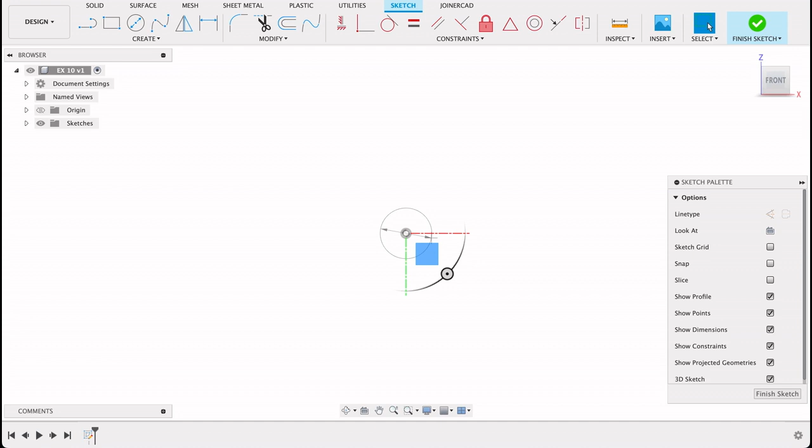I'll go into this one, create a sketch on any plane. C for circle, 24, 40, and now we've got our vertical lines.

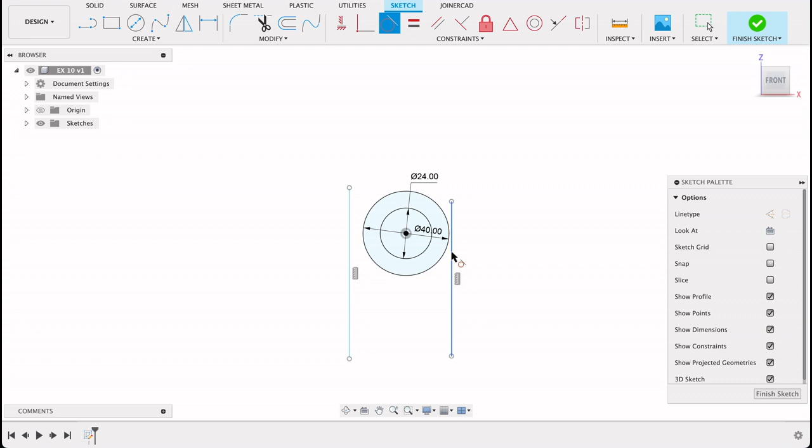L for line tool, and I'll just run them down vertical, not measuring them out yet, just making sure they're at least 30. Then we go tangent, select the line and the circle, and it pops it on there. T for trim, and we can trim this excess.

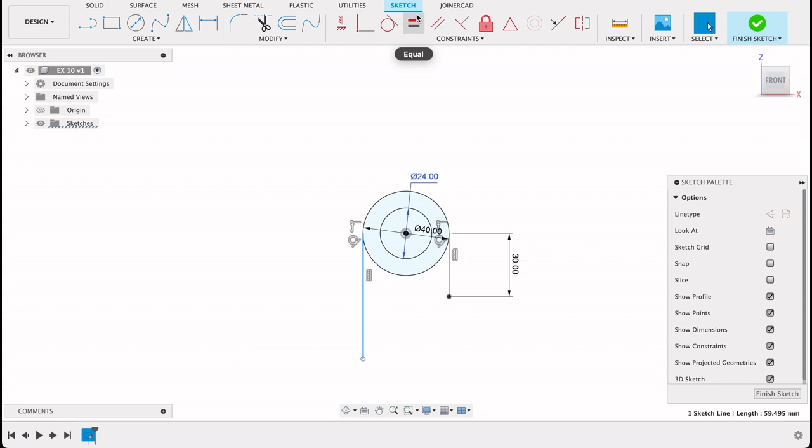Now we can dimension, D for dimension, set them to 30. I could do the same for this one, but instead I'm going to put in a horizontal constraint between this point and this point. Then we can see it's fully constrained.

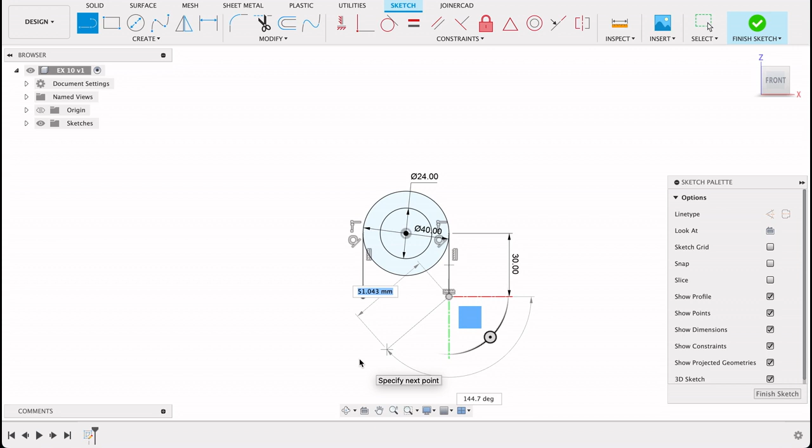Then we've got these diagonal lines running down. They're 50mm long and offset 45 degrees from that vertical. So we'll go line tool from this point, 50. Again, line tool from that point, 50.

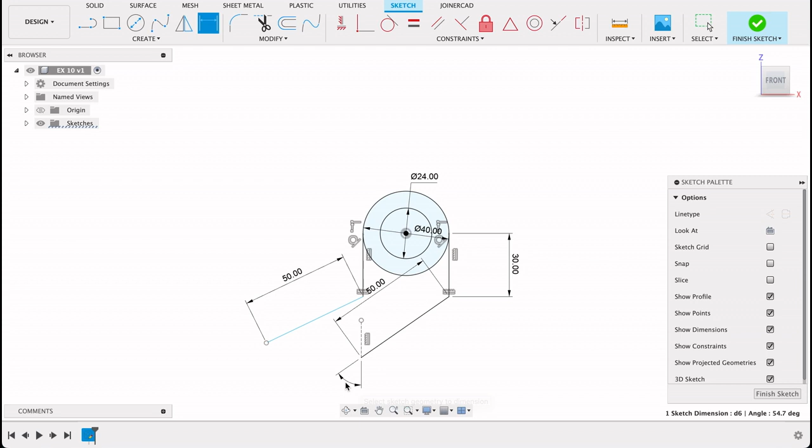We'll click there - you can see they're not set up right. We'll do another line here for our angle from this point, vertical. Now we can dimension between these two - we want 45 degrees. Now that's where we want it. You can see it's fully constrained.

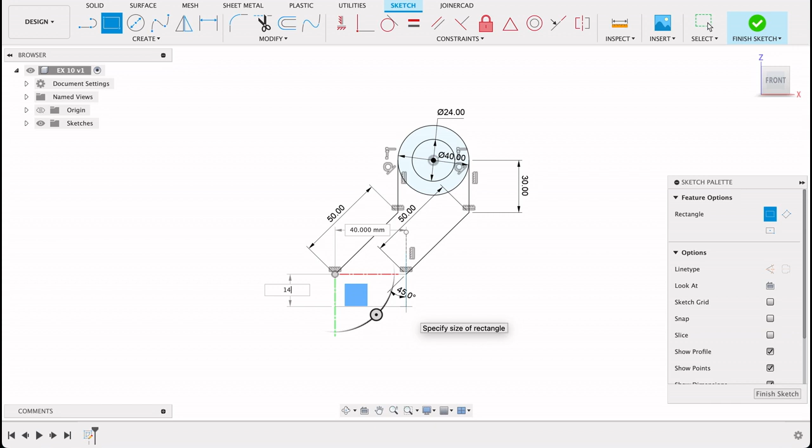I could repeat that step, put in a horizontal constraint. There's our line. Now we've got this little rectangle that goes across and is 14. Let's turn off construction - so that's 14 by 40. That's all fully constrained.

I'm going to finish this sketch and begin extruding. I can see this is 14, and I'll assume this distance is also 14, and this top circle will be the same as the bottom one at 18mm. It doesn't specify it, but that's what I'll assume for this drawing. Then that runs out 60.

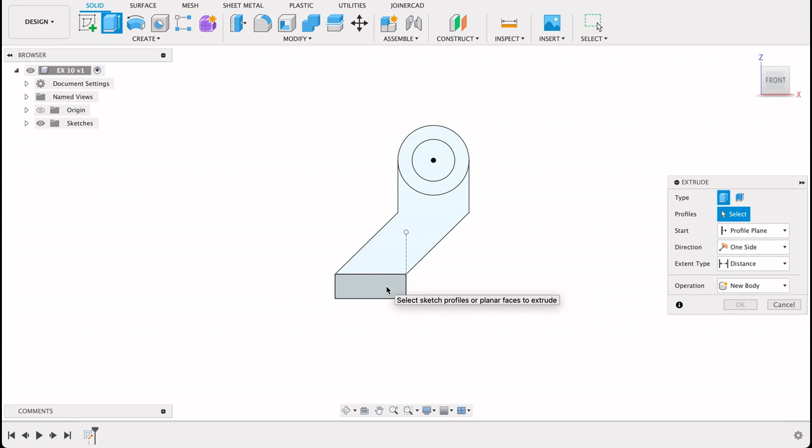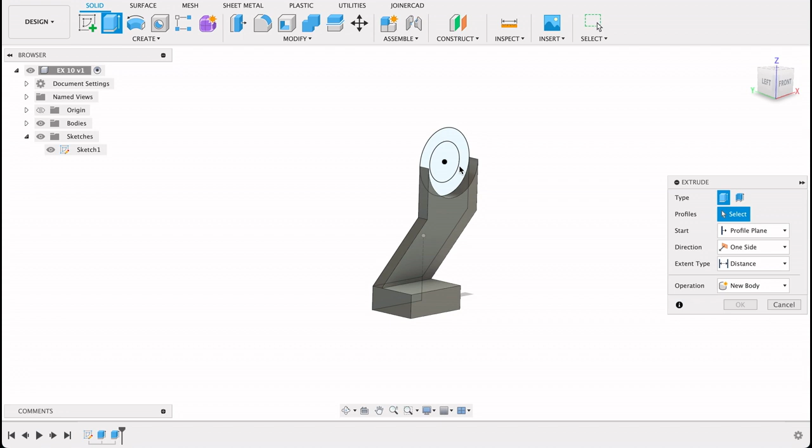Since it runs out 60, we'll do half of 60 at 30. I want it in the other direction, so I'll go minus 30. Let's turn our sketch back on. Extrude this - it was 14, so we'll go minus 7, half the distance. Then the circle, which is 9, minus 9 sorry. And it was all a join operation.

So there we got that top section. I'm going to create a sketch on this plane over there to do our bottom circle, which is 56 and 32, and then there's this little extra piece that brings it in line. So 56, 32, and then our rectangle.

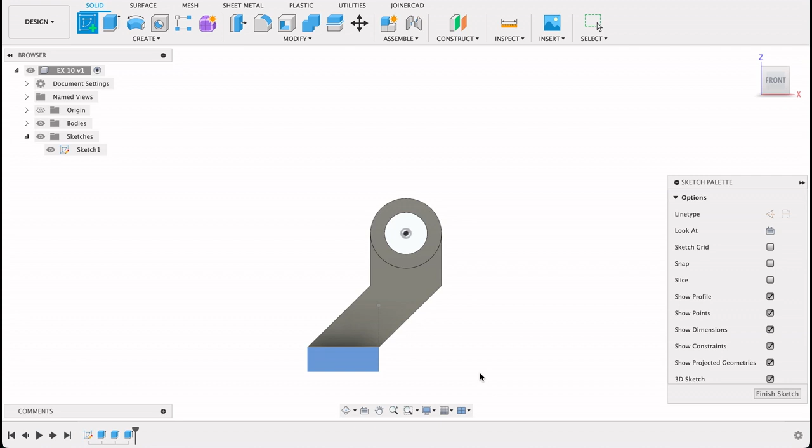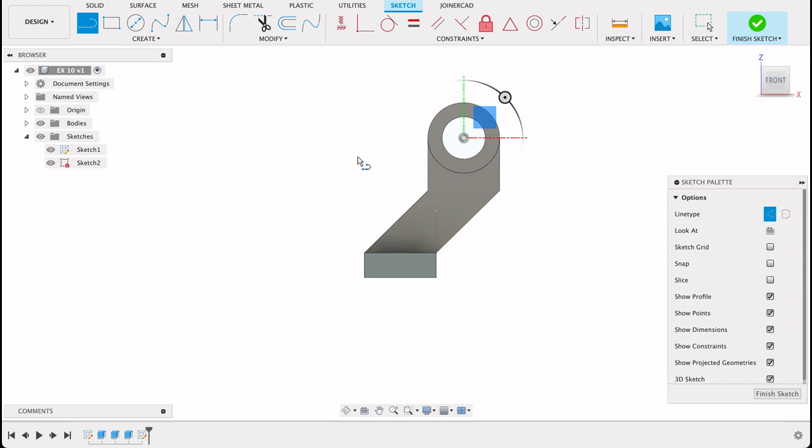So create a sketch on here. I didn't specify the distance, but I know it is from this point - it is 45 millimeters. That is the wrong tool, sorry. From that point, 45, enter, and then I'll just do another one of these.

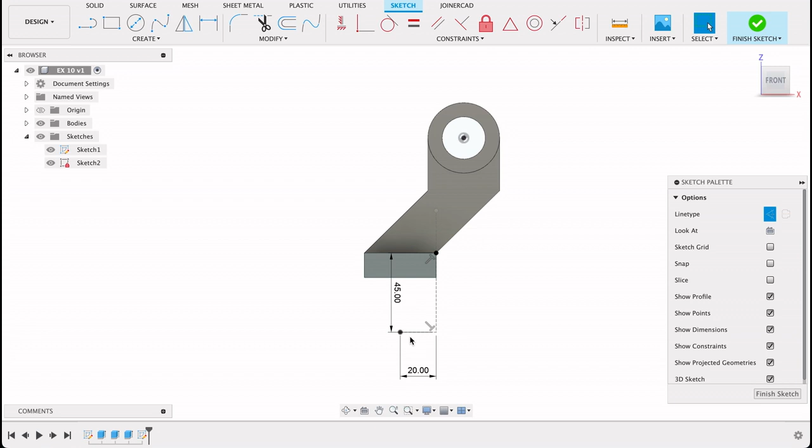So it'll tell us exactly where we're going to put our circle. I just went midpoint of this line, which is 30. This line is 40, so the midpoint would be 20. Now we can draw our circles.

Take off construction. I think it was 56 for the one, and the inside one I can't remember - let's jump back quickly. It was 32. Okay, so C and 32.

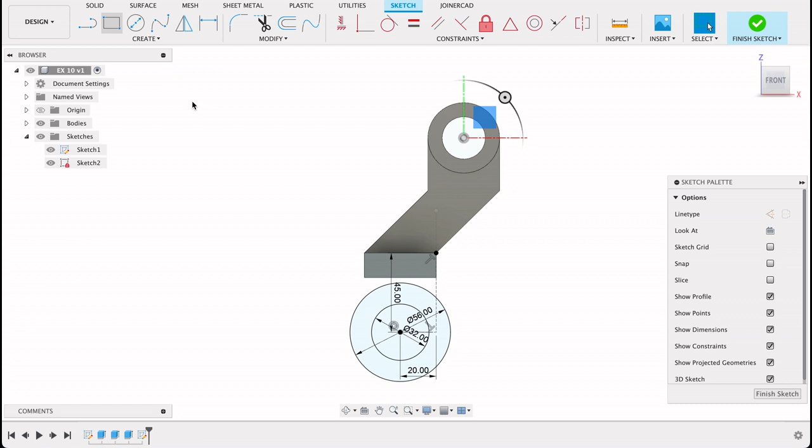Then we'll do our rectangle, which runs from this point. It just has to get past the tangent or past the mark on the circle - we don't want it going into the inner diameter circle. So over there, it's not constrained.

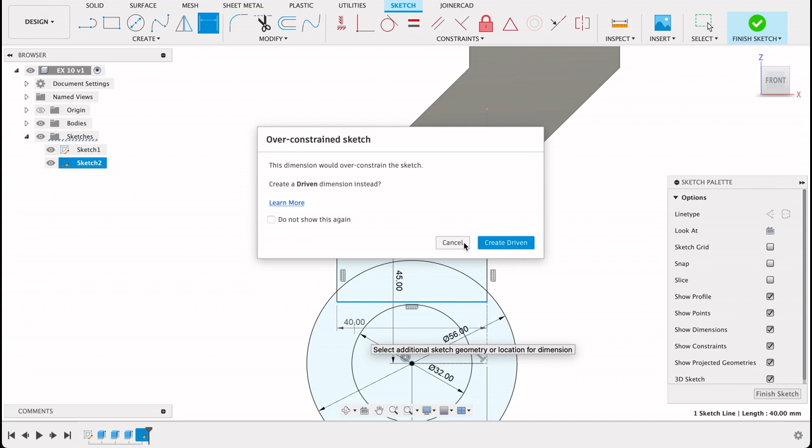We want this to be 40. We don't actually need to worry about that - that one's already dimensioned there. I'll just make that 14 nice and neat, just so that it's inside there. Finish sketch.

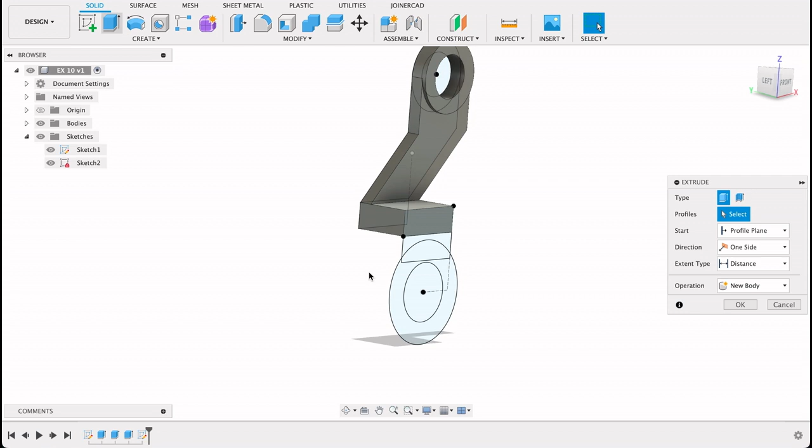Now we're going to extrude these. This is 18 and it sticks over by 4. So if I select the circle and go 2 sides, I know one side will be 14, the other side will be 4, and then it'll stick over.

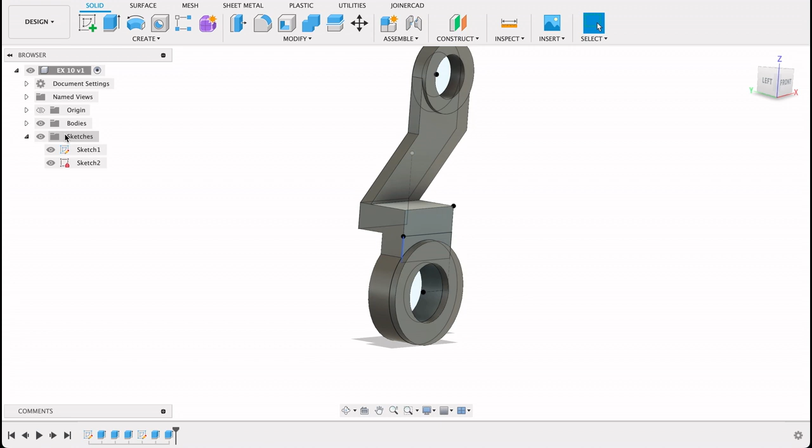Turn our sketch back on. Then we'll extrude our little rectangle part, which is minus 14. I can see it goes in there. I'll just turn off the sketches quickly, and we can see it's getting close to it.

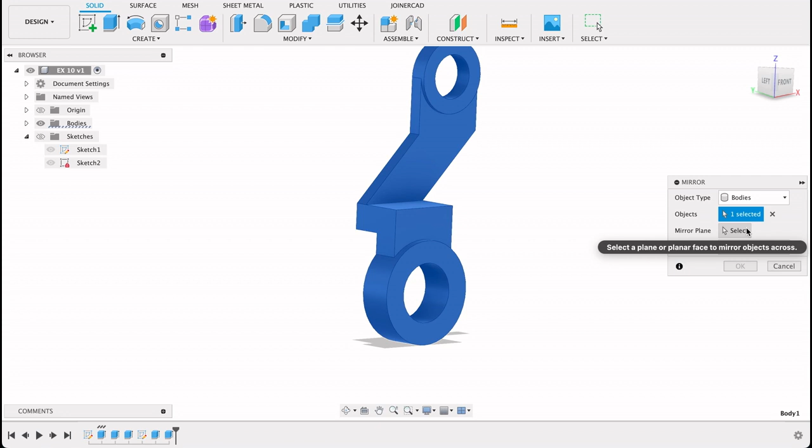What you'll see now is once we mirror it, we'll have our complete part. So we go create, mirror, select the object. The mirror plane will be the front plane. It was a join operation. And there we can see we've got our part.

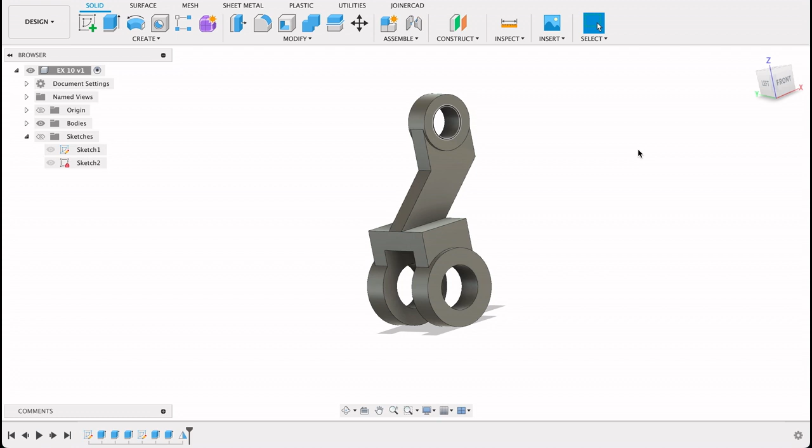As simple as that. That's one of the powerful things about mirror - you can get away with doing a lot less work, as well as using constraints like the horizontal constraint. It just makes drawing a lot easier once you figure out quicker ways to do it.

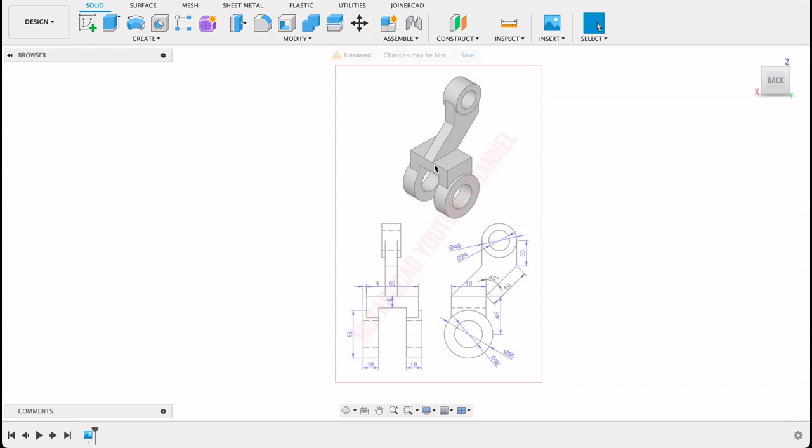It is one that I found on Pinterest. If I go back to it, it says Mufaso CAD YouTube channel, so he's got a YouTube channel, but I found this one on Pinterest. So there you go. Until next time, bye.